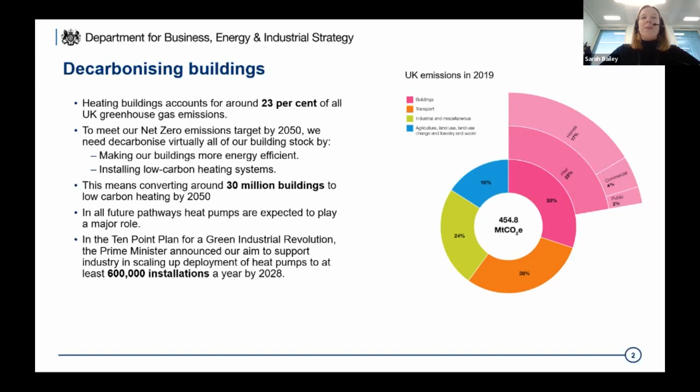For these buildings, the future pathway for decarbonising them is more uncertain. It's probably going to vary locally, but options include heat networks, efficient electric heating, so predominantly heat pumps, or replacing the gas in the gas grid with low carbon alternatives such as hydrogen or biogas.

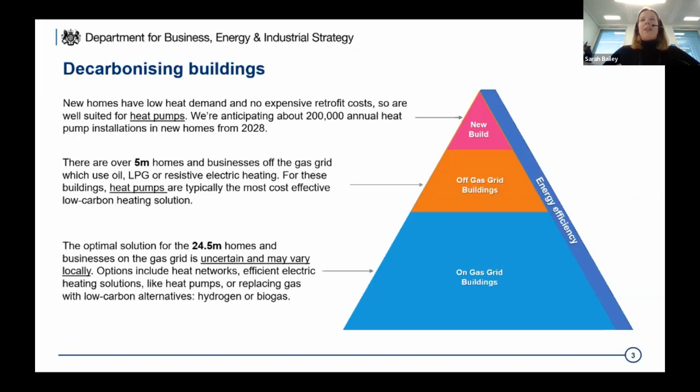Moving on now to the heat and building strategy. The strategy was published in October last year and sets out a number of near-term actions that we're taking to make sure that we remain on track to net zero.

That includes making homes more energy efficient, as I've mentioned previously. We want EPC C across all homes by 2035, where it's cost effective, practical and affordable to do so. We're also growing the UK heat pump market, aiming to deliver at least 600,000 annual installations by 2028, and that's up from 35,000 installations today. So we do have a way to go there.

And we're also expanding the use of low carbon heat networks, especially where there's waste heat or high densities of heat demand that we can take advantage of. We're also undertaking research and development to test the safety and feasibility of hydrogen for heating, including trials and pilots. That's to enable strategic decisions in 2026 on the future role of hydrogen and what that will mean for future UK heating.

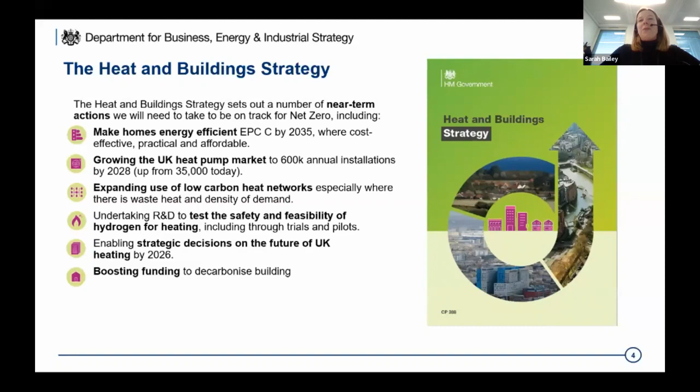And lastly, we're boosting funding to decarbonise buildings, and there's a whole host of funding schemes that are out there. Just to name a few, we've got the boiler upgrade scheme with £450 million attached to it, £950 million home upgrade grant, a social housing decarbonisation fund, and the public sector decarbonisation fund.

And the strategy is underpinned by 5 key principles for how we'll decarbonise heat in buildings. The first one is to take a whole buildings and whole energy system approach. That means considering heating needs and energy performance of the building as a whole, as well as considering how we decarbonise heat in parallel with decarbonising other sectors and areas.

We're also taking low regret actions now. So whilst the exact energy mix that will exist in 2050 isn't yet clear, we know that there's some actions that are needed in all scenarios, including improving building energy performance, reskilling the workforce and growing the market for both heat pumps and heat networks.

And we're also trying to balance certainty with flexibility by providing clear communications and signals to investment to provide market stability while still ensuring we have that flexibility in our approach.

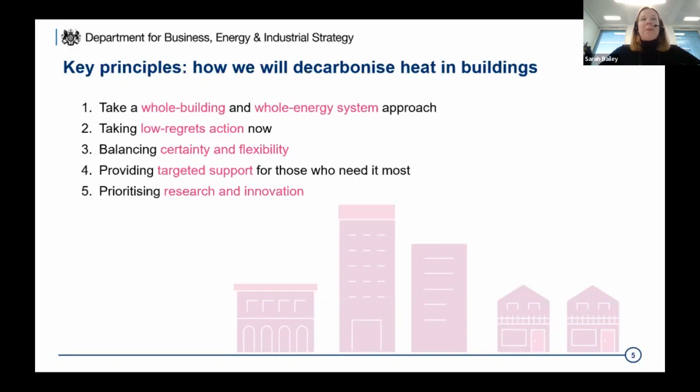And we're also providing targeted support for those that need it most, so fuel poor households and low income households in particular. And then last but definitely not least, we're prioritising research and innovation. That's to both improve our evidence base and the technologies that we have to underpin key policies and decisions that need to be made down the line.

So turning to energy efficiency, we're clear in the heat and building strategy that the journey to net zero starts with improving the energy efficiency of the fabric of our buildings. And this will not only save households and businesses money off their bills, it will also improve the comfort and value of their homes. So government has already committed to upgrading as many homes as possible to EPC Band C by 2035, where it's cost effective, practical and affordable to do so.

And we're supporting this by consulting on phasing in minimum performance standards across all tenure types. We're also looking to upgrade fuel poor homes to fuel poverty energy efficiency rating C by 2030. And we're doing that through investing 1.75 billion in the home upgrade grant and the social housing decarbonisation fund, which will help those living in the worst off gas grid homes and those on low incomes who are most vulnerable to fuel poverty.

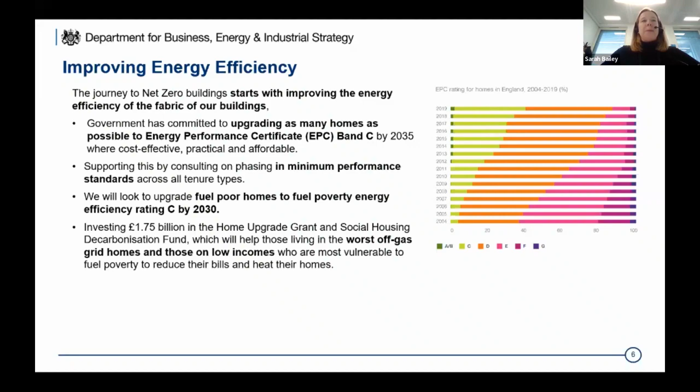We're also pursuing research and development on the safety and feasibility of hydrogen for heat. Unlike other technologies like heat pumps and heat networks, 100% hydrogen for heat is not yet an established option. So government is working with industry and regulators to deliver a range of research, development and testing projects to assess the feasibility, costs and benefits of using 100% hydrogen for heating.

And this includes a pioneering programme of hydrogen heating trials. So we've set the aim to deliver a neighbourhood heating trial by 2023 and a village trial by 2025. And then there's plans for a potential town pilot before the end of the decade.

So the neighbourhood trial will be the H100 project in Fife, and BEIS and Ofgem have invited the gas network operators to submit proposals for the village trial by December 2021, so that's just closed. And we're expecting some of the proposals will need some detailed planning in 2022 before location selection happens in 2023.

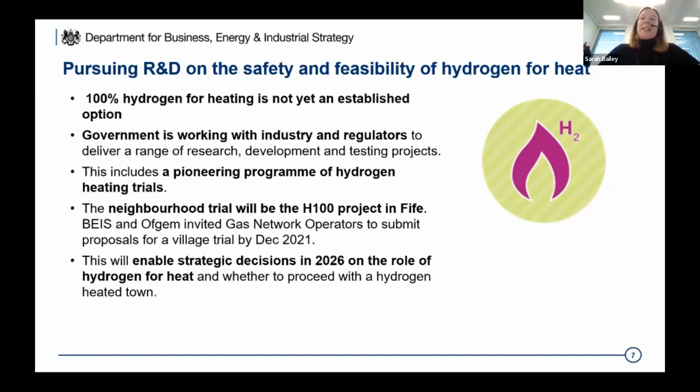And the local trials and planning work, together with the results of our wider research, development and testing programme, will enable strategic decisions in 2026 on the future role of hydrogen for heat, including whether we proceed with that hydrogen heated town. So what does this mean for heat pump deployment?

So as we've seen in the pyramid diagram, we think heat pumps will be a key technology for many buildings, including off-gas grid buildings and new builds, as well as consumers that may prefer to install a heat pump over other low carbon alternatives. For example, where a heat pump might be installed as part of a broader improvement to a home to create a smart home.

In terms of the timelines, 2028 is obviously the key date, and we're developing policies to ensure deployment of heat pumps reaches at least 600,000 installations by 2028. And then beyond that, if limited low carbon hydrogen is used for heating, we'd need to grow the heat pump market even further.

So we'd be looking at 1.5 million installations a year by the mid-2030s in order to switch over those remaining gas boilers by 2050.

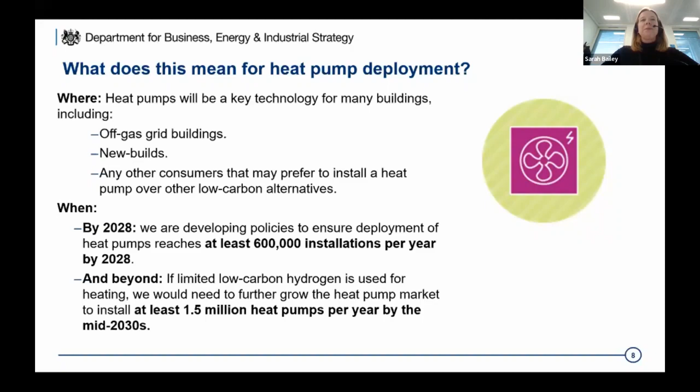So how will we achieve this? There's a number of pillars for how we're going to go about building the market to deliver 600,000 installations a year by 2028. The first one is proposed regulations.

Alongside the heat and buildings strategy, we launched a number of consultations on regulations. For off the gas grid, we're proposing to phase out new fossil fuel heating installations in large non-domestic off-gas grid buildings from 2024. From 2026, we're proposing to phase out new fossil fuel heating in small non-domestic and domestic buildings.

Moving over to new build, we're looking to make clean heat the norm in new buildings through the Future Homes Standard, which is going to be introduced in 2025. We're also consulting on ending new connections to the gas grid for new build domestic properties in England from 2025. On the gas grid, the future of heat pumps really depends on that strategic decision on the future of hydrogen in 2026.

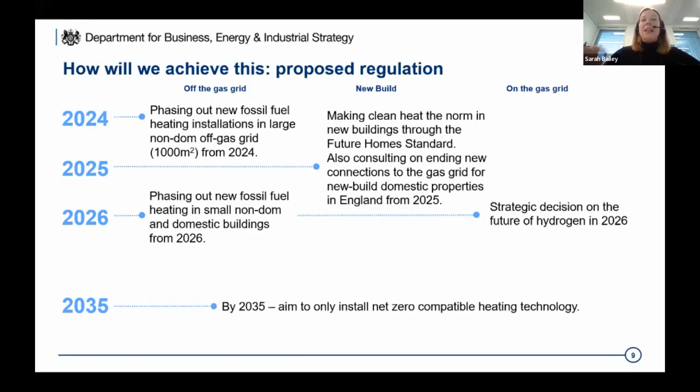But across all of those types of buildings from 2035, we're aiming to only install net zero compatible heating technology. Moving on to building the market.

We're looking to build the market through providing public funding and green finance, as well as a new market mechanism. Starting with public funding and green finance, as part of the heat and buildings strategy we announced £3.9 billion worth of new funding for decarbonising heat and buildings from 2022 to 2025. One of the key ones there for heat pumps, although all of the schemes have some aspect of heat pump deployment, is the boiler upgrade scheme.

This will be launching in spring 2022 to replace the domestic renewable heat incentive, which is closing in March. The scheme will provide £450 million worth of funding over 3 years, with £5,000 worth of upfront grants to support the installation of air source heat pumps and £6,000 to support the installation of ground source heat pumps.

We've also awarded £1.8 million worth of funding to promote green lending products for energy performance improvements, as part of the Green Homes Finance Innovation Fund competition.

Then moving down, we've got the market mechanism. Subject to consultation, we're proposing to bring in an obligation for fossil fuel boiler manufacturers from 2024 to achieve a proportion of their sales, growing in line with the trajectory of market growth needed to meet our 600,000 heat pump installation target by 2028.